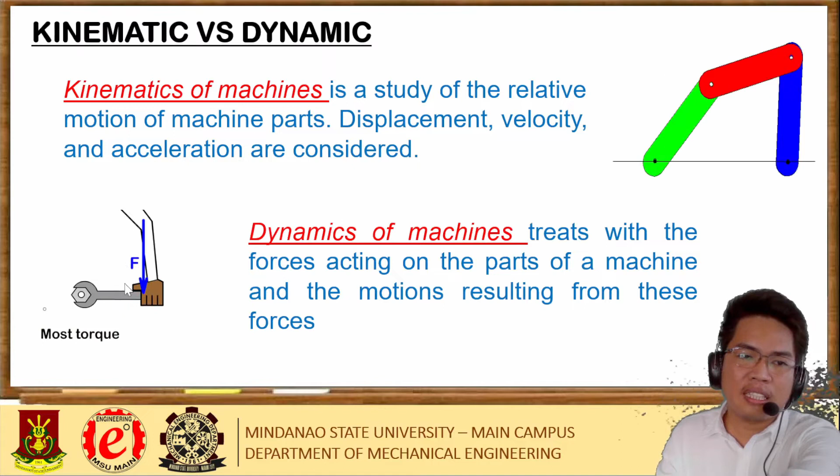Kinematics of machines. This is just the mechanism of linkages that we are studying. We get the velocity, the displacement of the linkages, things like that. And in dynamics, force is also involved. So what amount of torque do we need to push this wrench? Things like that. So let's proceed to machines.

I know you're familiar with him, Rancho. So he defines machine as anything that simplifies work. Let's read it: anything that simplifies work or saves time is a machine.

It's a warm day, press a button, get a blast of air - the fan, a machine. Speak to a friend miles away - the telephone, a machine. Compute millions in seconds - the calculator, a machine. We are surrounded by machines, from a pen's nib to a pant's zip, all machines. Up and down in a second - up, down, up, down, like a zipper. This is the simplest definition of machine.

But let's look at the definition of Chatur. He is Chatur. Machines are any combinations of bodies so connected that their relative motions are constrained, and by which means force and motion may be transmitted and modified, as a screw and its nut, or a lever arranged to turn about a fulcrum, or a pulley about its pivot, etc., especially a construction more or less complex consisting of a combination of moving parts or simple mechanical elements as wheels, levers, cams, etc.

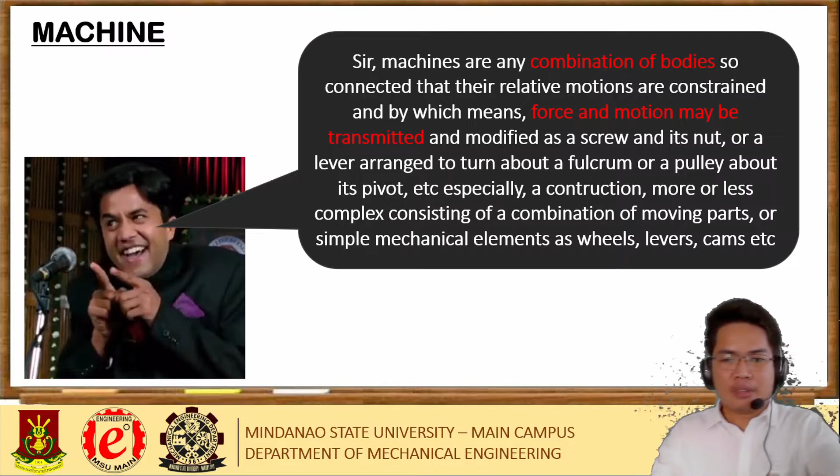So what I want you to take note of is a machine is any combination of bodies, and force and motion may be transmitted. So the sole purpose of a machine is to transmit or transform force and motion. That's it.

Another definition of machine: a machine is a device for transforming and transferring energy. It is defined as consisting of a number of fixed and moving bodies interposed between the source of power and the work to be done, for the purpose of adapting one to the other. So take note about this - transforming or transferring, and interposed between. A machine is only a device that is being interposed, like it's placed in between, and then the sole purpose of a machine is to transform or transfer the energy.

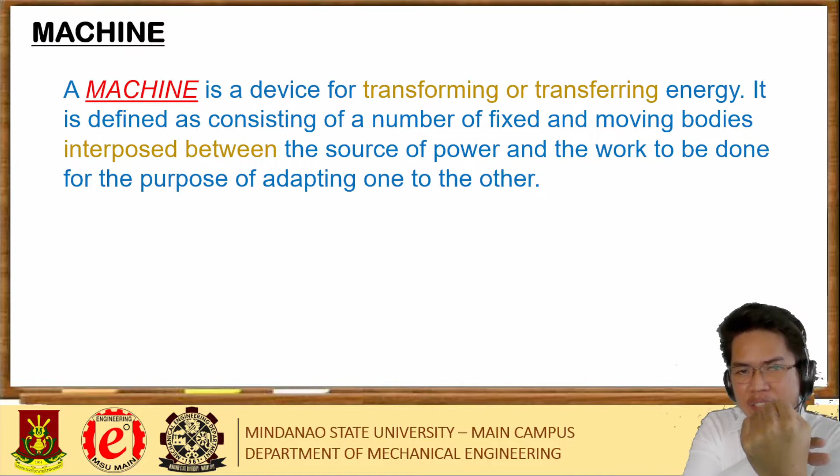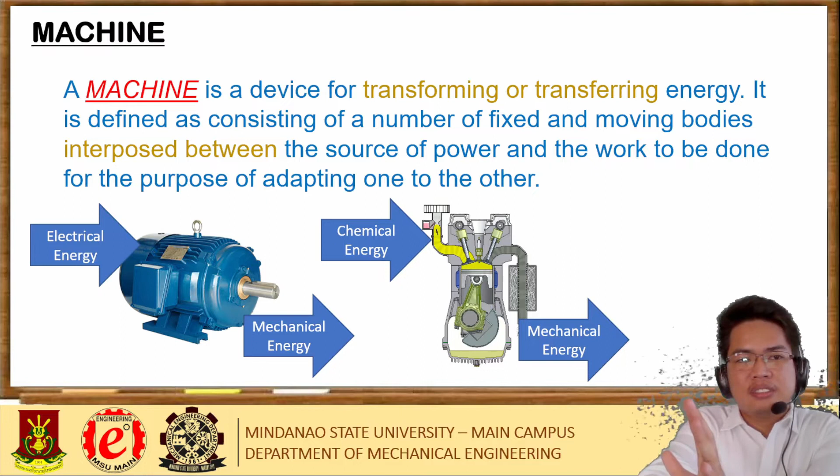So if we have mechanical energy transformed into electrical, we have something like a generator. Another example is this: we have electrical energy transformed into mechanical energy, a machine called a motor. Here, an engine - an engine is also a machine. It transforms chemical energy into mechanical energy. So that's it, a machine transforms or transfers energy. It is interposed between the source of power and the work to be done.

So let's proceed to kinematic diagram. In the picture here, we have a diesel engine. So when we create a kinematic diagram, all the elements that are not contributing to the dynamics of our mechanism are eliminated. And what remains is what we call the skeleton form. This is the form of what we call the kinematic diagram.

In our kinematic diagram, we have what we call a link. A link is the name given to any body which has motion relative to another. So in this kinematic diagram, anything that moves in the diagram is what we call a link.

And the fixed link is called the frame. Frame is a part of a machine which is stationary and which supports the moving members, designated link 1. So in our diesel engine, in this skeletal form, this is our frame. But in the skeleton form of our kinematic diagram, this is denoted or drawn as a ground. It's fixed, ground.

So ground is considered or designated as link 1. So we have 4 links here: link 4 our slider, link 3, and link 2. And then link 1 is our ground. So here, for example, the ground, here, ground. Later we'll find out if it's singular, binary, or ternary.

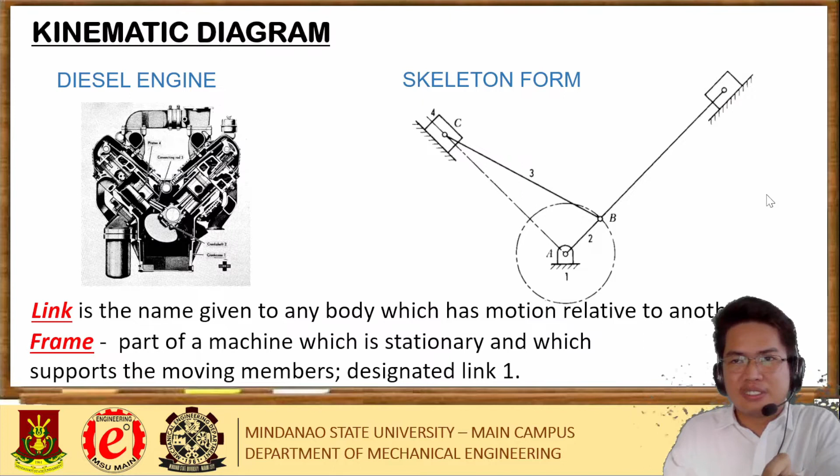So, kinematic diagram - the formal definition of a kinematic diagram is a scale drawing representing the machine so that only the dimensions which affect its motion are recorded. So that's it.

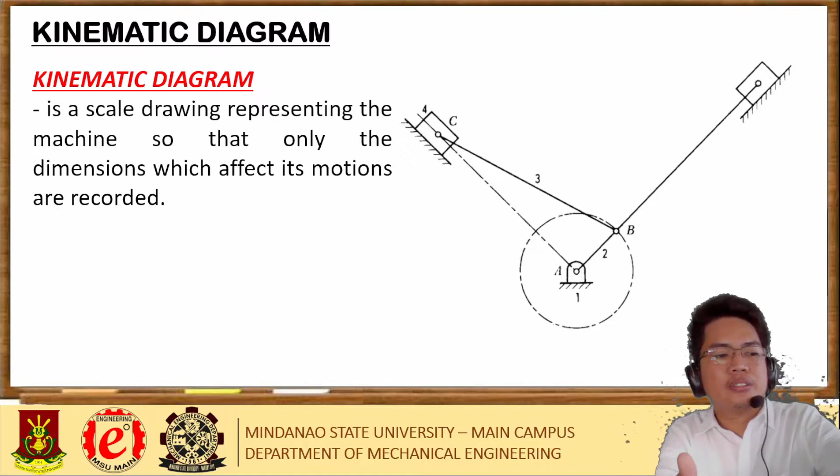So we have what we call also a rigid link. A rigid link is one whose deformations are so small that they can be neglected in determining the motion of various other links in a machine. So as we observed earlier with our diesel engine, if we draw the skeleton or skeletal diagram of our diesel engine, the crank, which is considered as one link, is drawn as a line, because the motion of our mechanism in the diesel engine does not depend on how thick our link is.

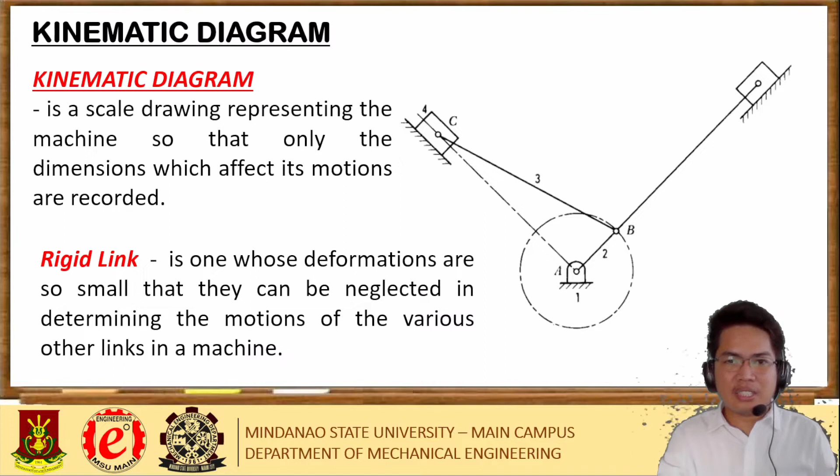We can represent it as a line here. Our crank is also considered a rigid link because it doesn't bend, unlike springs or belts, which do bend. So examples of rigid links are crankshafts and similar components.

There is also a classification of rigid links: singular link, binary link, and ternary link. So what's the difference between singular, binary, and ternary?

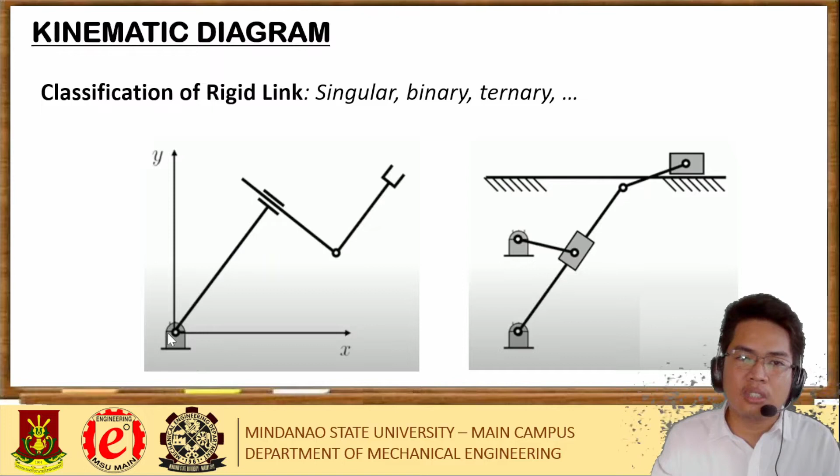Earlier we defined the rigid link. Another type of link is a flexible link. A flexible link is one which, while transmitting motion, is partly deformed in a manner that doesn't affect the transmission of motion. Examples of these are the spring, the chain, the rope, and the belt.

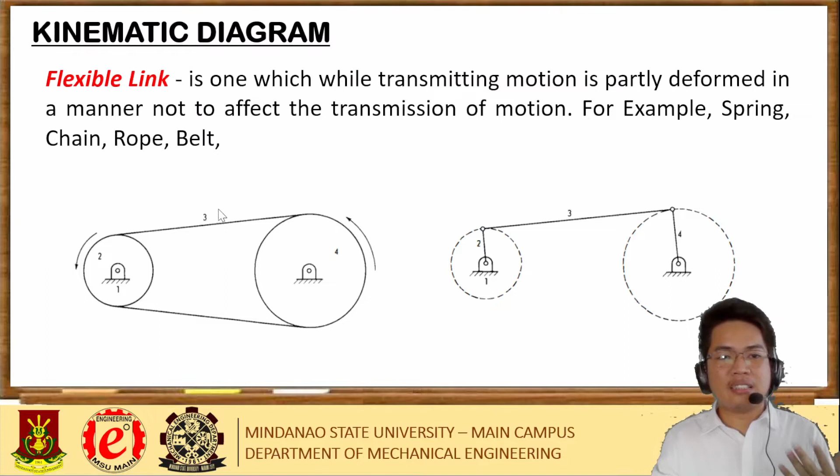That is, if we analyze the kinematics, the term here is 'instantaneously,' meaning at that moment only, at that specific point, at that instant. So if we calculate the kinematics of this mechanism at that instant of time, or instantaneously, we can replace the flexible link with a rigid link if that link is always in tension.

Another example of a flexible link is this. We have a piston here. We know that if we push this, A2 here will rise. So the flexible link considered here is the fluid we use to move this piston. Another equivalent representation of this is the figure on the right.

If we apply force here going downward, the piston on the right side rises, going upward, right? Same here: if we have a rigid link with a pivot, and we push A here at a distance D1, B rises at a distance D2.

So if we analyze the kinematics of this mechanism at an instant of time, we may consider that the kinematics are the same, but only if the ratio of A1 and A2 is equal to the ratio of d1 and d2.

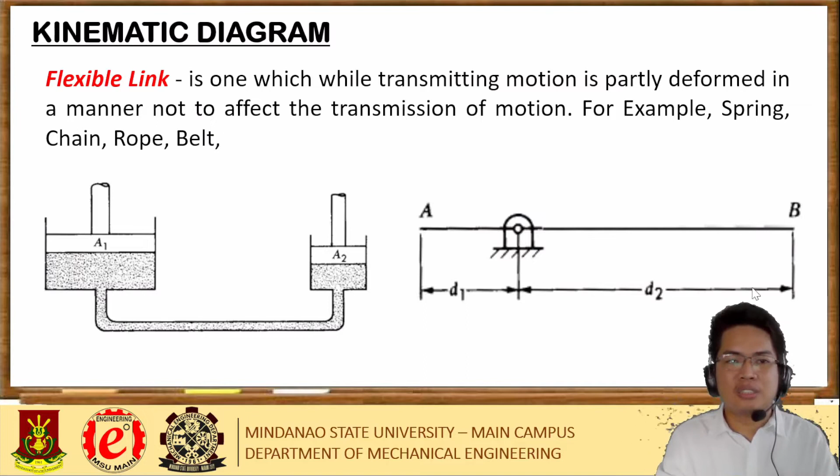So if you push A downward, B rises, but not in a straight line rise, it rises like a rotation. But if we consider only an instant of time, the velocity is going upward, not rotating. So this figure is somewhat similar to the other figure.

Another topic: kinematic chain. What is a kinematic chain? A kinematic chain is a system of links, which are rigid bodies, that are either joined together or in contact with one another in a manner that permits them to move relative to one another. So if we have links connected such that one link is fixed while the others can move freely relative to it, it is considered a kinematic chain.

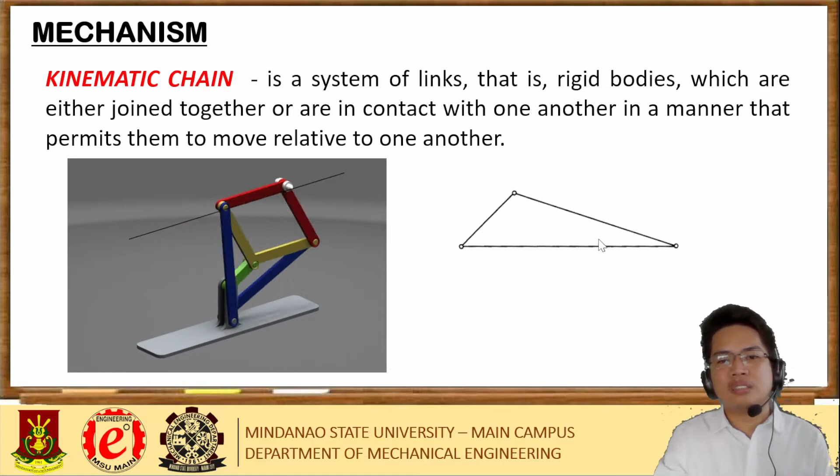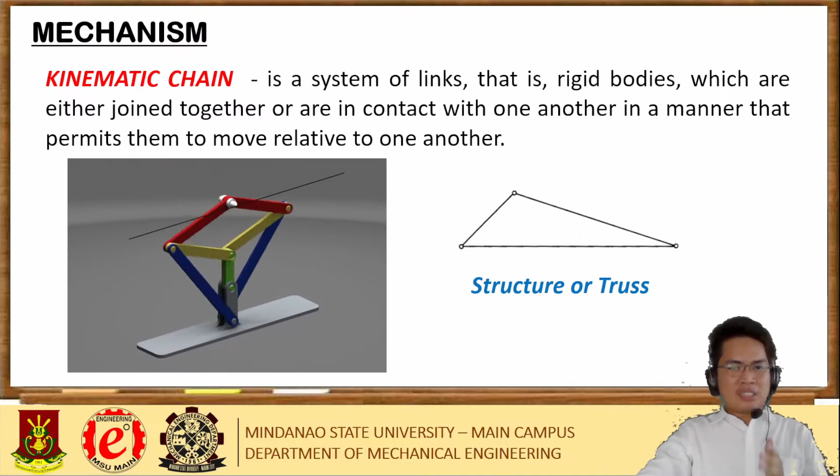This is not considered a kinematic chain because even if the links are connected and you fix one link, the other links can't move relative to one another. That's what we call a structure or truss. So a kinematic chain that doesn't move, we call it a structure or truss.

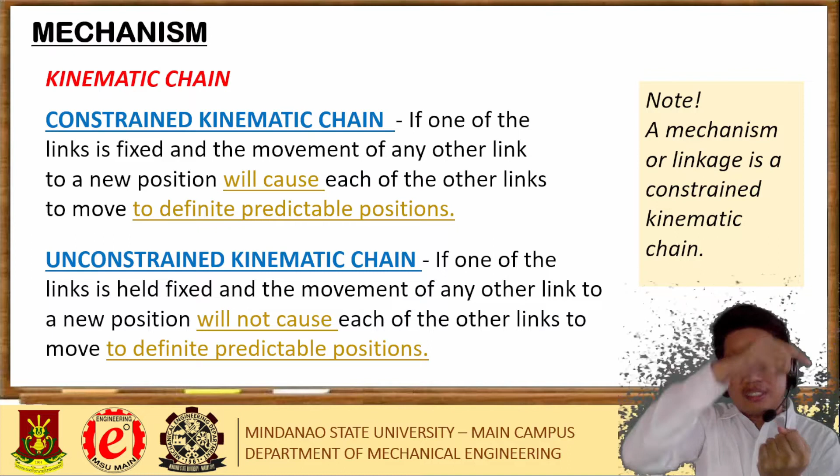So if you have a kinematic chain with one link fixed, and then moving the next link causes movement in the other links, and the position of those links is definite or predictable, that is considered a constrained kinematic chain. I'll give an example to make this clearer - this is the difference between constrained and unconstrained.

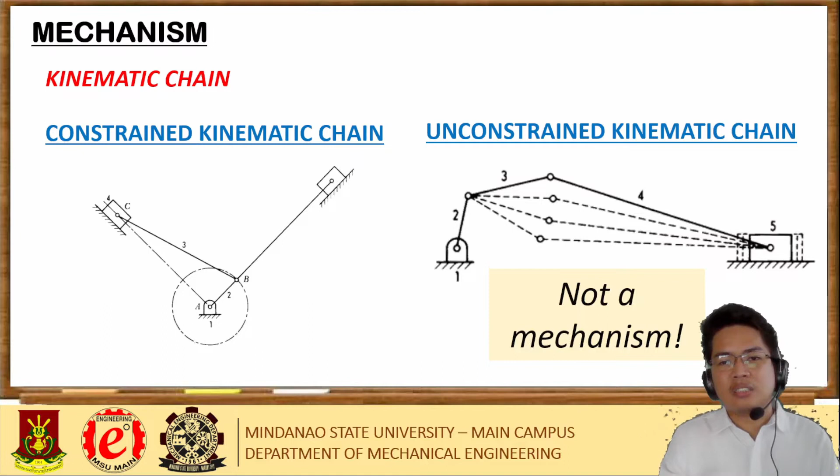So that's the difference between constrained and unconstrained. It's also important to note that a mechanism is considered a constrained kinematic chain, so all unconstrained kinematic chains are not considered mechanisms. I want you to elaborate on why this statement is true.

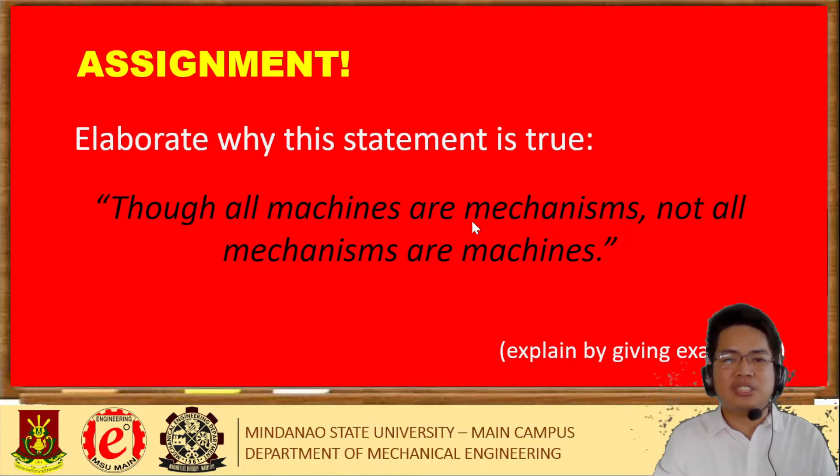Though all machines are mechanisms, not all mechanisms are machines. You can search and I want you to explain why this statement is true - that all machines are mechanisms, but not all mechanisms are machines. That's your assignment.

Let's proceed. Kinematic chain can also be classified as planar kinematic chain or spatial kinematic chain. In a planar kinematic chain, all links move in parallel planes. An example of this is the bulldozer - all the movement of these links is parallel, even if there are spaces, the movement is parallel to one plane.

The spatial kinematic chain is one where link motion is not restricted to any plane. It can move in 3 dimensions or in 6 degrees of freedom - translationally in x, y, and z, or it can rotate along the x-axis, y-axis, and z-axis.

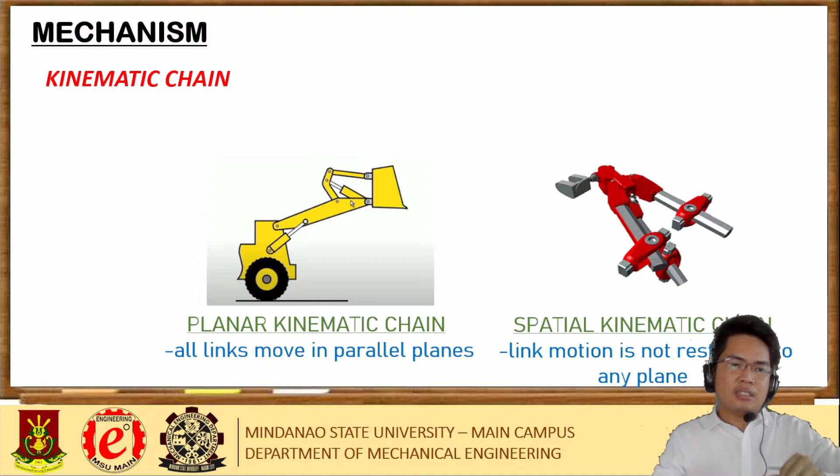Kinematic chain can also be classified as closed kinematic chain, open kinematic chain, and hybrid kinematic chain. In a closed kinematic chain, no singular link exists - a singular link is defined as a link with only one connection point. In this example, all the connection points have 2 connections, so there's no singular link here.

How about open kinematic chain? An open kinematic chain is a kinematic chain that has at least one singular link and no closed chain. An example of this is a robotic arm.

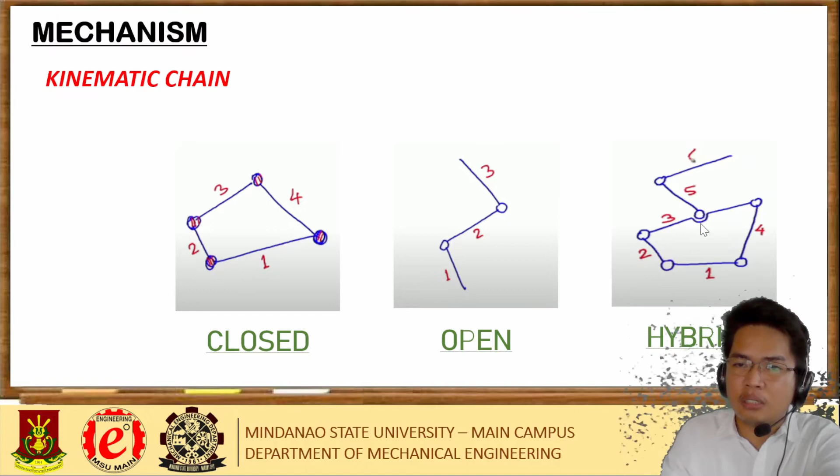The hybrid kinematic chain is a combination of closed and open. We have here a closed kinematic chain combined with an open kinematic chain, and together that forms a hybrid kinematic chain.

We have kinematic inversion. What is kinematic inversion? Kinematic inversion is the process of fixing different links in a kinematic chain. An example is the slider crank mechanism, where the ground, our link 1, is being fixed. If we apply inversion here, we allow link 1 to move while fixing other links, either 2, 3, or 4.

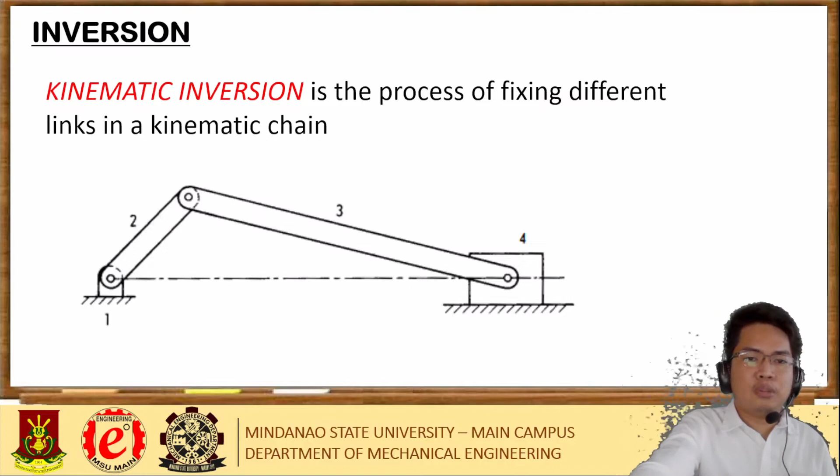So kanina, slider crank mechanism, link 1 ang fixed. So if we apply kinematic inversion, we allow other links to be fixed. So example nito is if we allow link 2 to be fixed and yung link 1 natin, yung ground, ina-allow natin na mag-move. Example nito is yung radial aircraft engine.

So this is also slider crank mechanism where link 2 is being fixed. Makikita to sa aircraft engine. As you can see, link 2 here is being fixed. Yung red na part, ito yung circle, parang electric fan. Yung center niya na nagro-rotate siya is hindi dito, nandito. At saka dahil may distance or length itong link 2, we allow the piston to move up and down. Kaya nag-move yung piston. Itong klaseng engine na ito ay ginagamit sa aircraft, pero ngayon parang hindi na siya nag-e-exist.

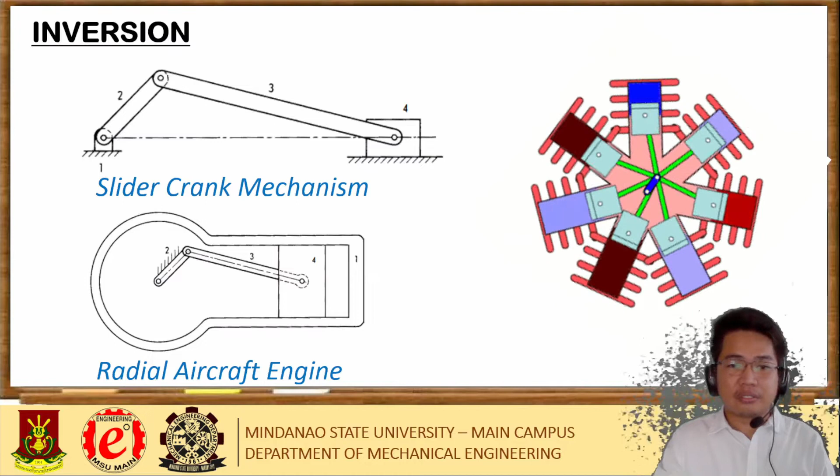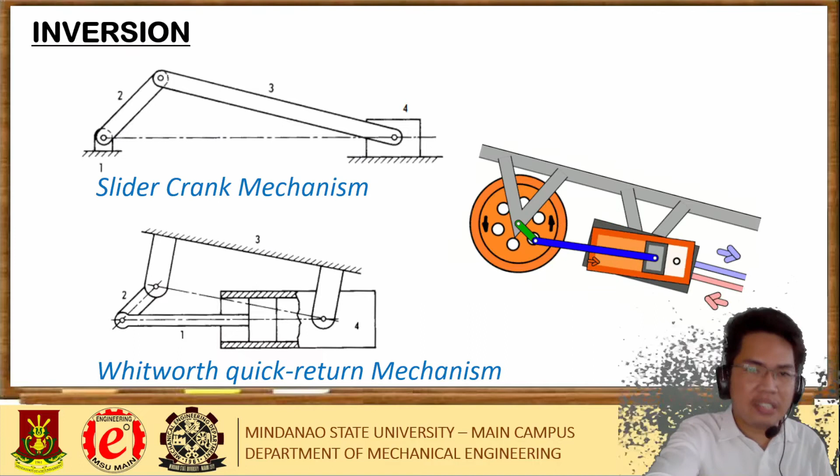So if we allow link 3, this part here, to be fixed, we have what we call a Whitworth quick return mechanism, which is an inversion of the slider crank mechanism. Ito yung fixed link natin, yung 3. At saka as you can observe, ito yung ground natin na sa slider crank hindi nagmo-move. Dito nagmo-move na siya. Nagmo-move na yung link 1 natin or yung ground natin with respect sa link 3. So Whitworth quick return mechanism, another example, inversion of slider crank mechanism wherein link 3 is the fixed link.

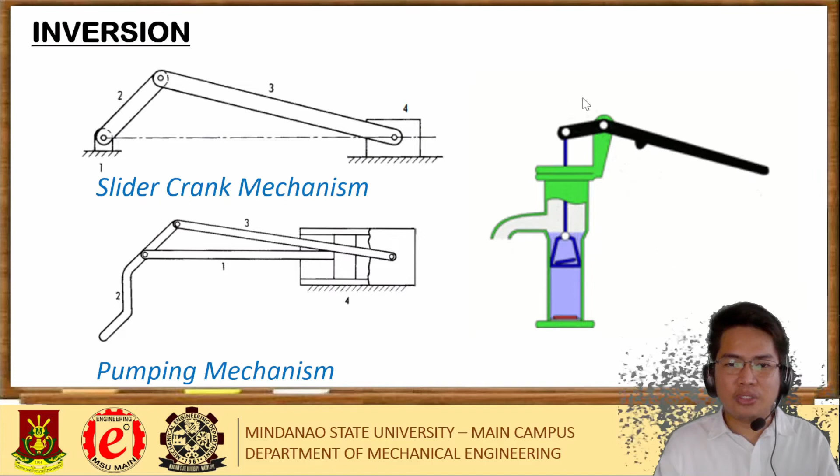So another inversion ng slider crank mechanism here is pumping mechanism wherein our slider is yung fixed link. Example niya is itong pumping mechanism.

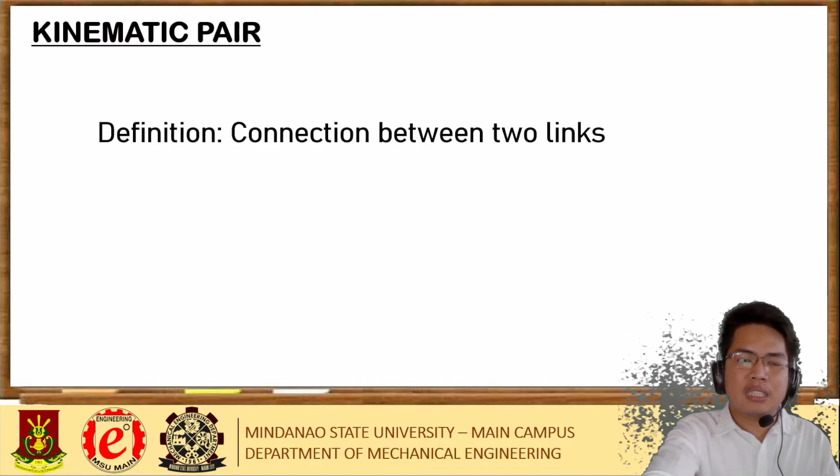So we proceed to kinematic pair. Kinematic pair definition is connection between two links. Example nito is hinge. If you have two links that are connected, the connection between the two links is what we call a kinematic pair. Yung pinapasok mo dito, yan, ang tawag dito is a kinematic pair.

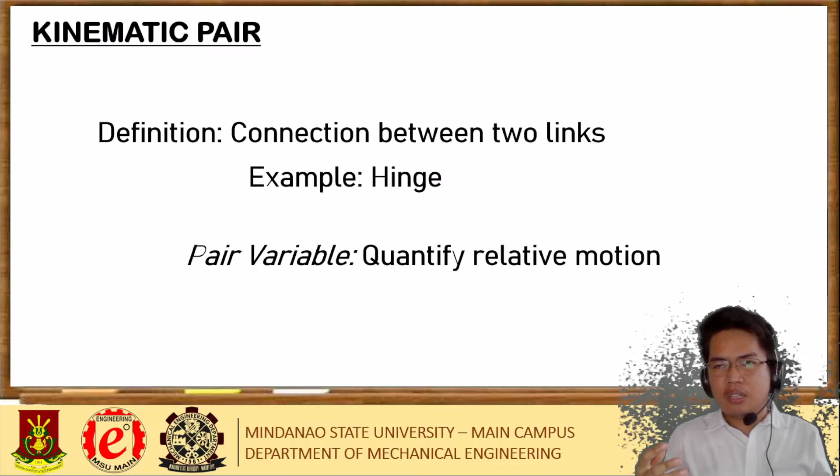And in order to quantify the relative motion ng link using that kinematic pair, that variable is what we call pair variable. So a pair variable is a variable that quantifies the relative motion of the two links that are connected by a kinematic pair. Example ng pair variable is yung angular displacement or angular velocity.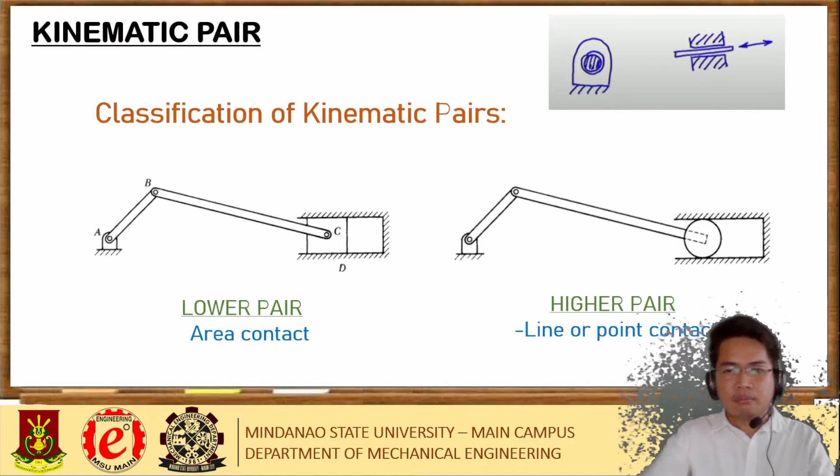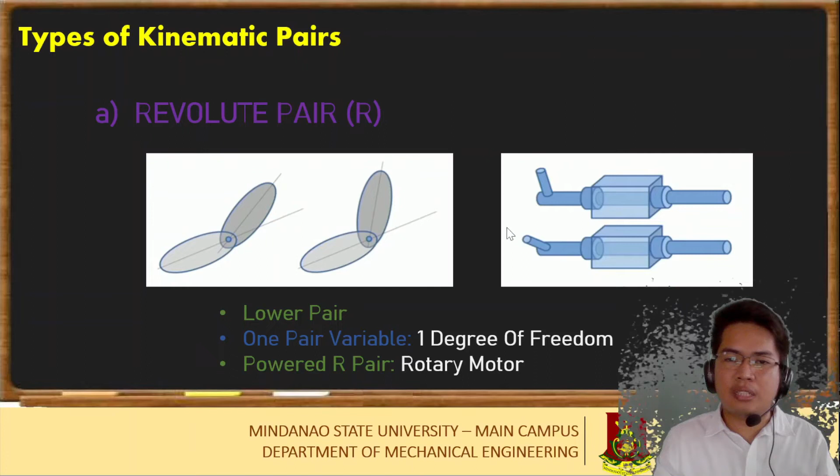Example nito dito. So types of kinematic pairs - kanina dinefine natin at classify natin yung kinematic pairs. Meron ding tinatawag na types of kinematic pair. Here we have revolute pair. It is a lower pair kasi yung hinge na ginagamit dito is may area contact. Consider siya as one pair variable because yung movement ng link dito can be quantified by angular displacement. So it has 1 degree of freedom. In a three-dimensional view, ito siya, yung angular displacement niya, magmo-move siya dito.

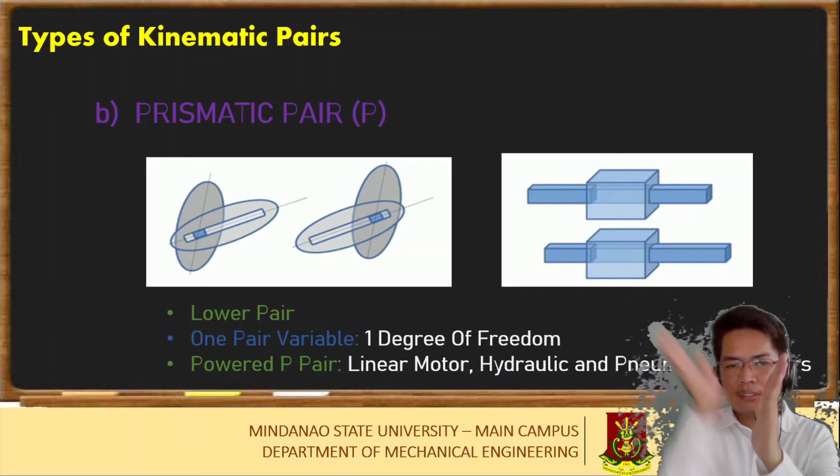We have also prismatic pair. Prismatic pair, it can move sideways, up, down. So one pair variable lang, distance. Hindi angular kasi hindi siya nagmo-move ng paganito, nagmo-move siya ng paganito. So we have 1 degree of freedom. Another is screw pair, 1 degree pa rin.

Cylindrical pair - two pair variable na to, why 2? Because it can rotate as well as move sideways. So two pair variables here: the displacement and the angular displacement.

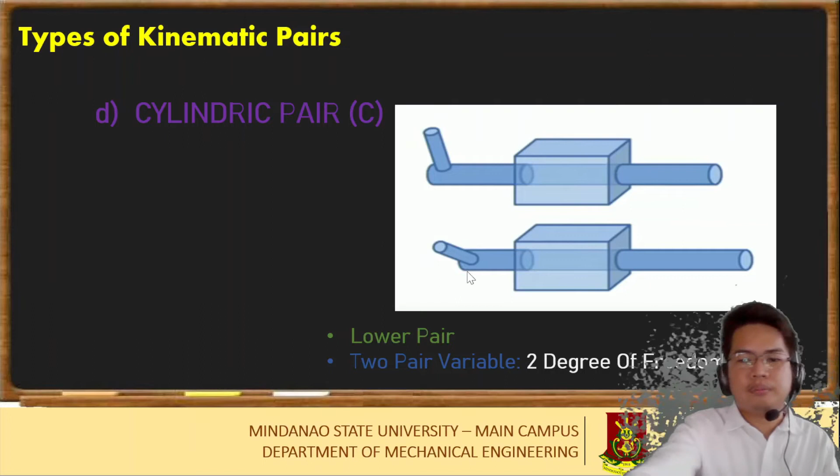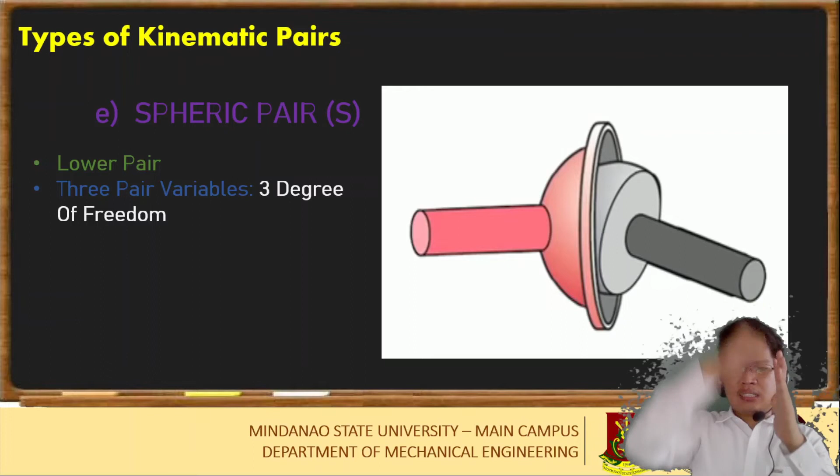We have spheric pair. We have 3 pair variables. Bakit 3 pair variables? It cannot move along the x-axis, y-axis, and z-axis, but it can rotate along the x-axis, along the y-axis, and the z-axis. Kaya it has 3 degrees of freedom.

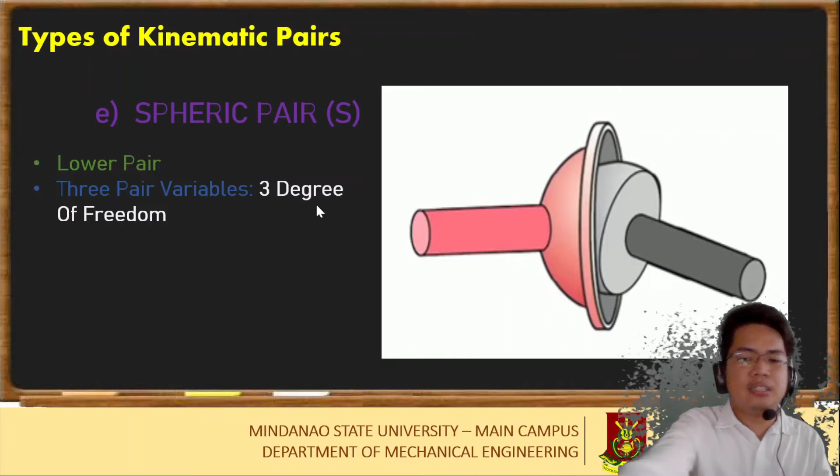Then we also have what we call higher pairs. Higher pairs is somewhat like a combination of the pairs. So example dito, we have 2 pair variable kasi it can rotate and it can also translate, so 2 degrees of freedom. Kasi ito hindi na prismatic, yung kanina prismatic ay nag-restrict nito to move paganito.

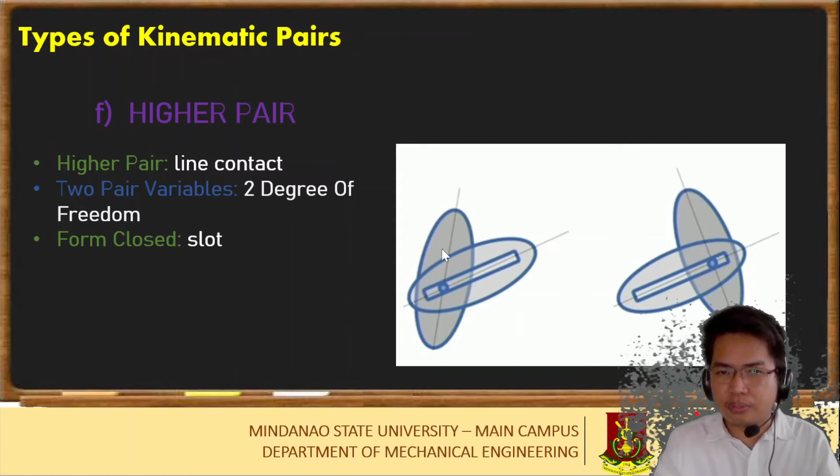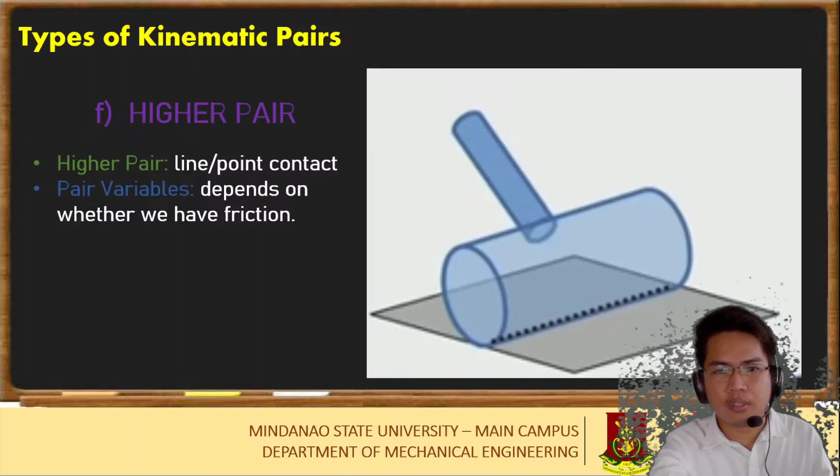Let's proceed to motion. Plane motion: a body has plane motion if all its points move in a plane or in planes which are parallel to some reference plane. The reference plane is called the plane of motion. Plane motion can be one of three types: translation, rotation, or a combination of translation and rotation.

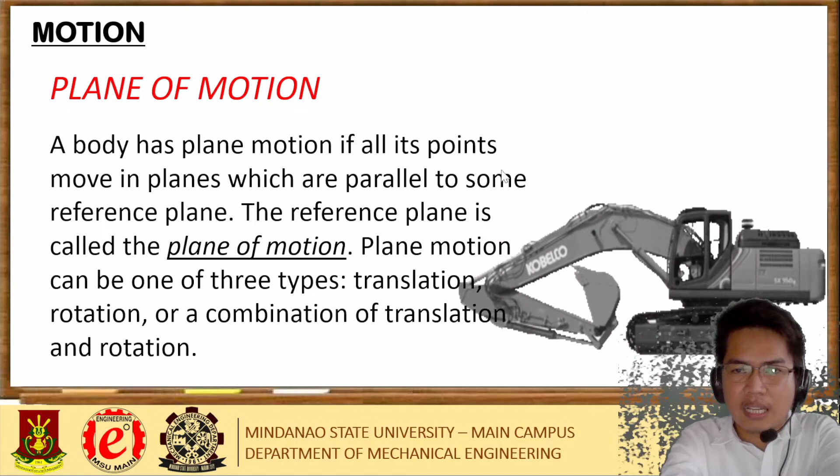An example of this is our backhoe. It has a plane motion. All the motions of the link here are parallel to one plane.

Now let's define translation. A body has translation if it moves so that all straight lines in the body move to parallel positions. We identify translation as either rectilinear translation or curvilinear translation.

It's rectilinear motion if it moves this way, straight. If it has curvilinear translation, it's like this - it follows a path that is curved, but the pen's position remains parallel to its starting position. For example, your pen will move this way, parallel from the start.

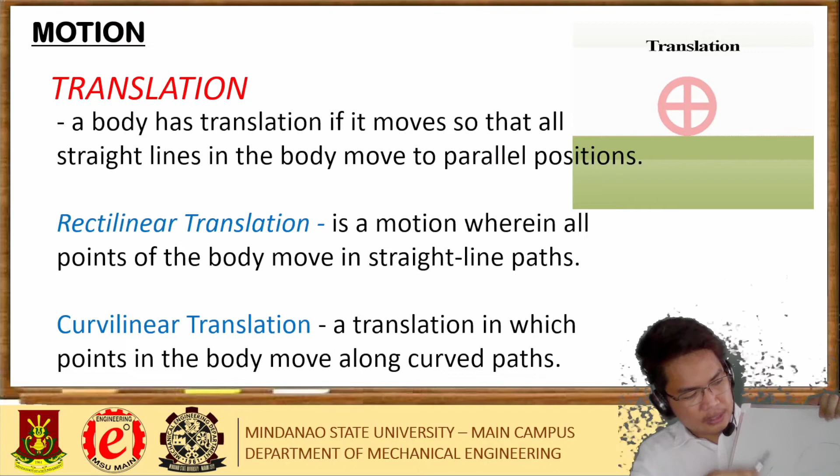We also have rotation. In rotation, all points in a body remain at a fixed distance from a line which is perpendicular to the plane of motion. This line is the axis of rotation. The points in the body describe a circular path about it. You already know rotation, right? You know that already.

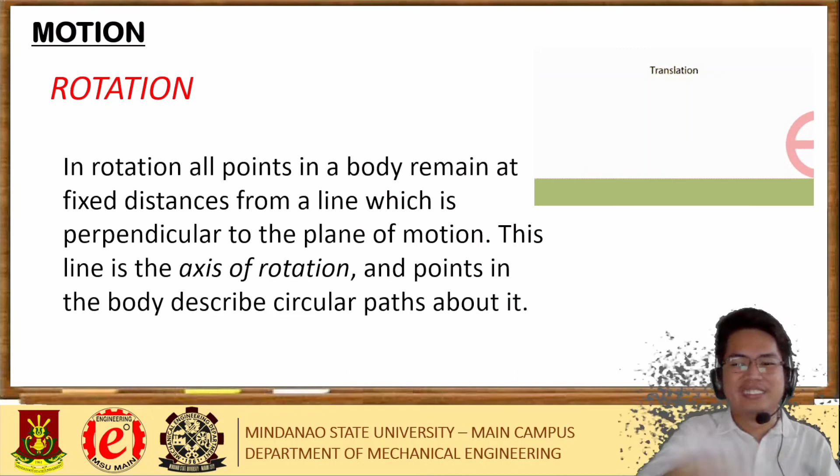We also have a combination of translation and rotation. Look at this example: a slider crank mechanism. As our crank moves, our links also move. From this position, our crank moves to this position.

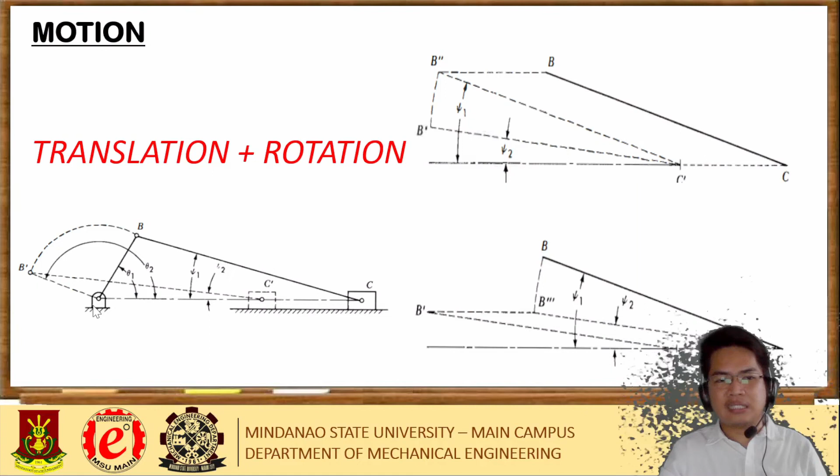We also have spherical motion. An example of that is in this figure. If we draw a point at the top, the motion of our point is such that the distance between the point and the center is always equal, no matter where it goes or rotates - the distance stays the same. That is what we call spherical motion. A body has spherical motion if each point in the body has a spherical motion.

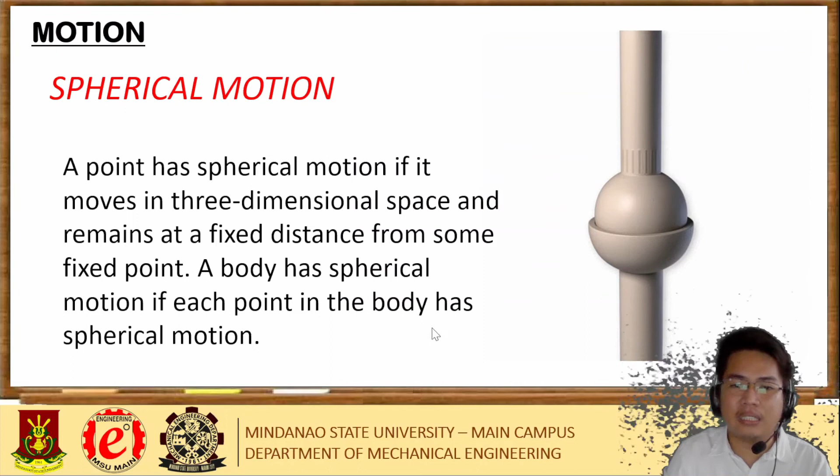We have cycle, period, and phase of motion. A mechanism completes a cycle of motion when it moves through all its possible configurations and returns to its starting position - that is what we call a cycle of motion. For the crankshaft, it repeats this way - one such cycle is considered one cycle of motion.

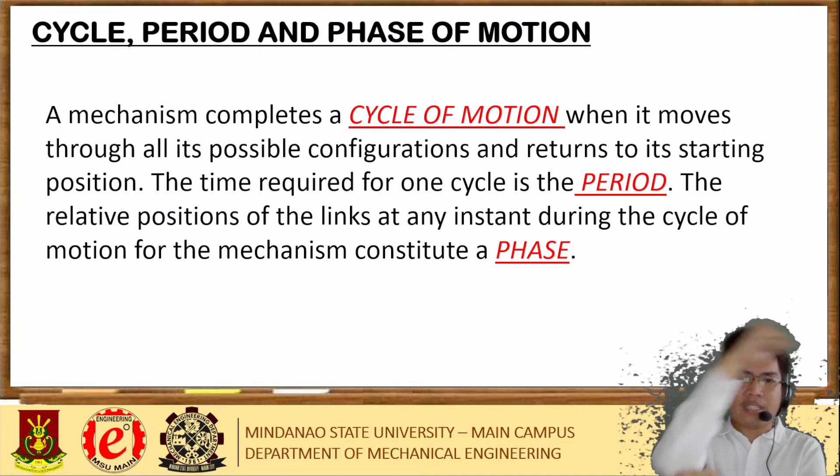The time it takes to finish one cycle is what we call a period. The relative position of the links at any instant during the cycle of motion for the mechanism constitutes a phase. For example, with our crankshaft, this is one phase, and another phase is going back.

Let's proceed to defining vectors. We have scalar quantities and vector quantities. Quantities that don't have direction, only magnitude, are what we call scalar quantities. You already know this from physics, right? If it has magnitude and direction, that is what we call a vector quantity.

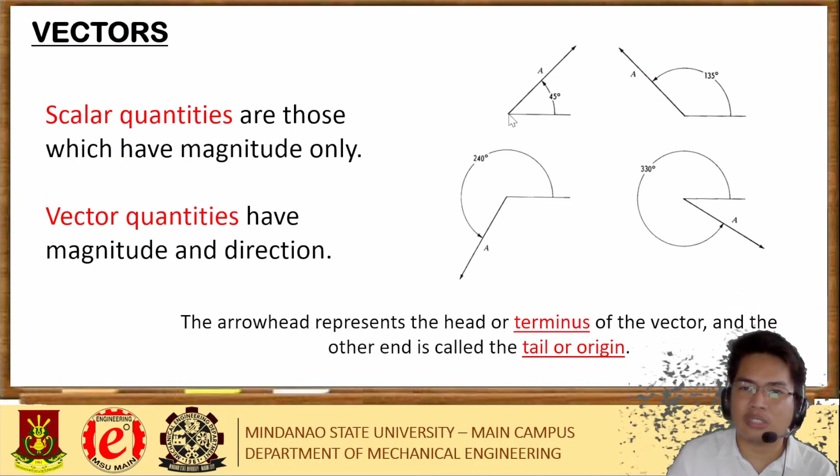If we draw a vector, the arrowhead is what we call the terminus of the vector. The tail is what we call the tail. The other end of our vector is what we call the origin. So one end is called the origin and the other end is called the terminus.

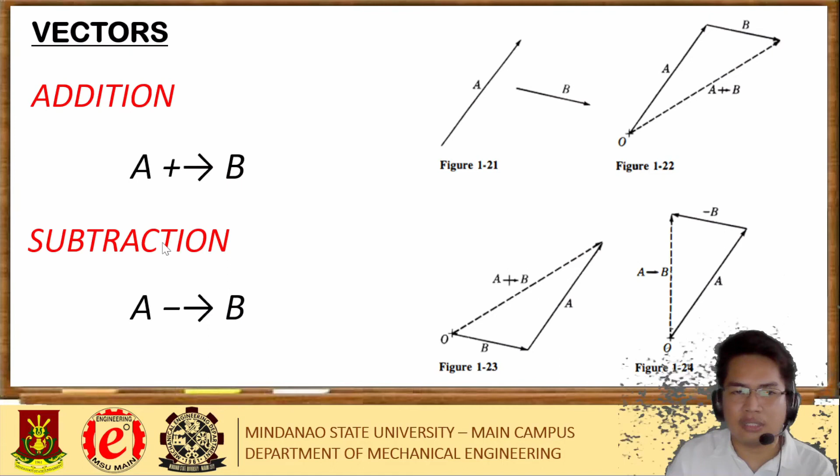In adding vectors, if we denote adding vectors like A plus B, we give a symbol of a plus sign and an arrow here. This means that vector A is being added to vector B. For subtraction, we have a negative sign here - this is vector A minus vector B.

Composition and resolution of vector. Composition refers to the adding together of any number of vectors. The sum is called the resultant, and the vectors are called the components of the resultant. Resolution refers to the breaking down of a vector into any number of components. Any vector can be resolved in an infinite number of sets of components.

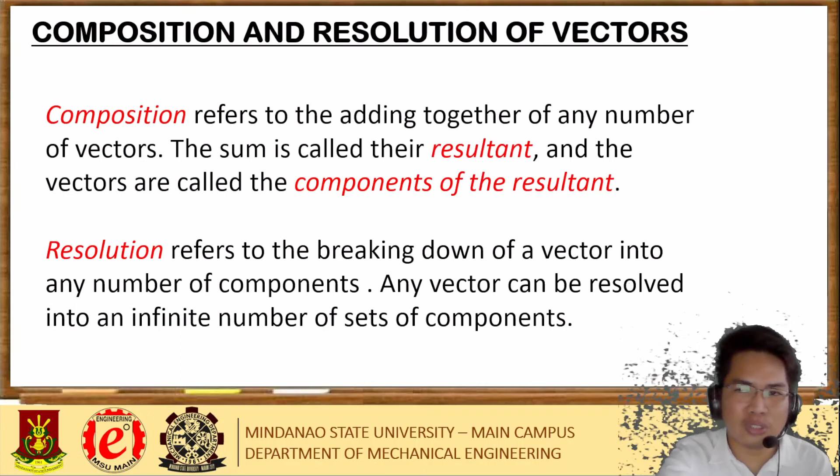So if you add vectors, that is what you call composition, and the sum of all the vectors is what you call the resultant. If you do resolution sa isang vector, yung components niya ay tinatawag na components of the resultant. So resolution is resolving the vector into its components, while composition is adding vectors.

Next example, what if hindi natin alam yung direction ng B at saka C? We are given vector A, and vector A has components na B at saka C. But what we know is only the magnitude of B and C, and we don't know the direction of the components B and C. So ano yung gagawin natin?

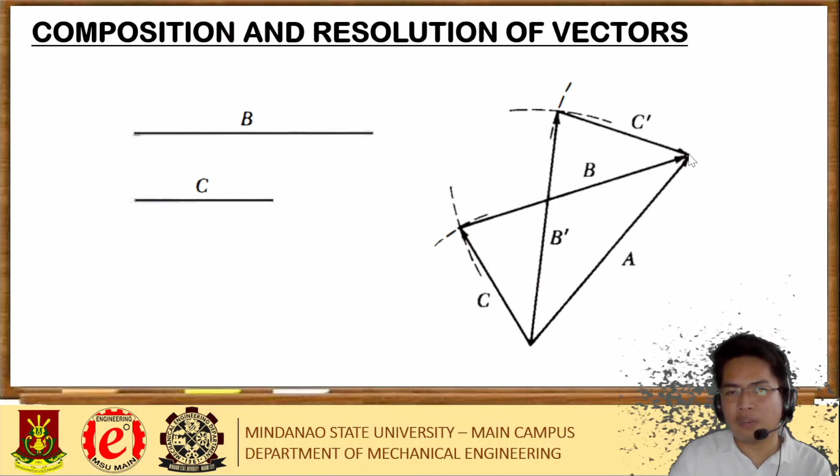Pumunta naman tayo sa terminus ng vector A natin. Again, let's do the same: gagawa tayo ng arc na may radius na C, at saka another arc na may radius na B. At saka yung intersection natin, i-connect natin yan. Connect at saka connect, tsaka connect at saka connect.

So ito, we have now the direction of our components. Pwede dito C at saka B, or ito B at saka C dito. So that is how we figure out the direction of the components of vector A.

Next, what if yung vector A natin, yung component niyang B, ang given lang ay direction, then yung component naman niyang C, ang given lang ay magnitude? Ano yung gagawin natin? First, we draw vector A. Then we draw an arc na ang radius niya ay yung component na given yung magnitude, dito yung C. So gagawa tayo ng arc.

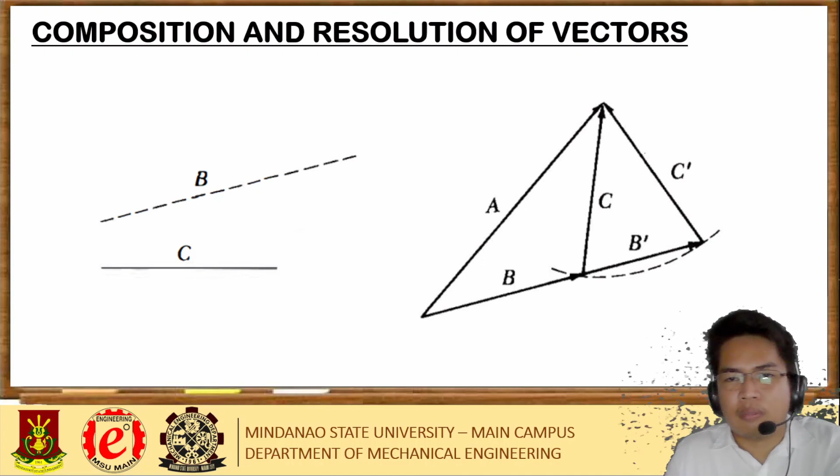As a summary, we have discussed the difference between kinematics and dynamics. We defined what is a machine, what is a kinematic diagram, what is a mechanism, and I have shown you different inversions of the slider crank mechanism. We have also discussed kinematic pairs, their classifications, their types, and we discussed motion, cycle, period, and phase of motion. We have also discussed vectors and the composition and resolution of vectors.